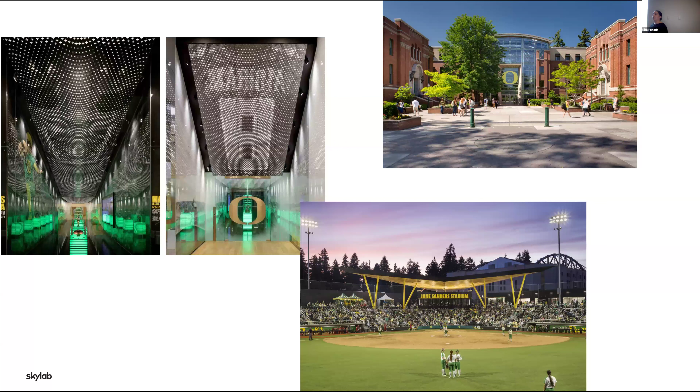I've also had the opportunity in my career, when I was with SRG, to work on several really fun projects on campus - kind of coming full circle back to my interior architecture education here. Early in my career I worked on Lillis, and then my last couple of projects at SRG were the Marcus Mariota Sports Performance Center and Jane Sanders Stadium, which were incredible design projects and a really fun opportunity to be back on campus exploring design here.

So that was a little bit about me.

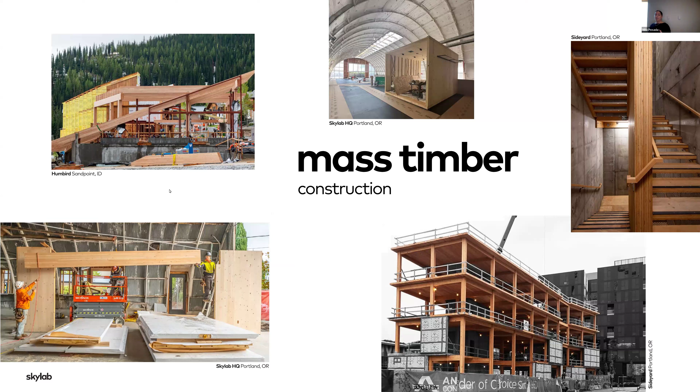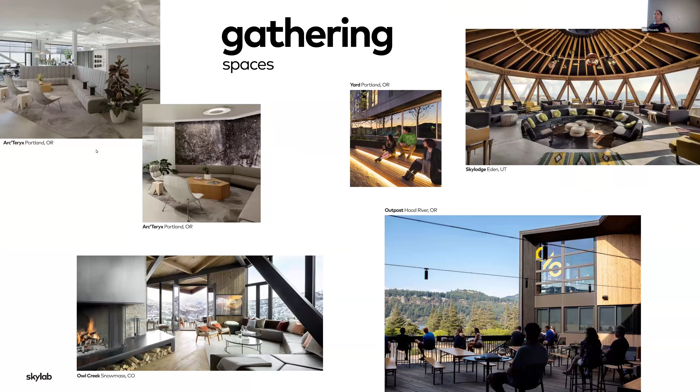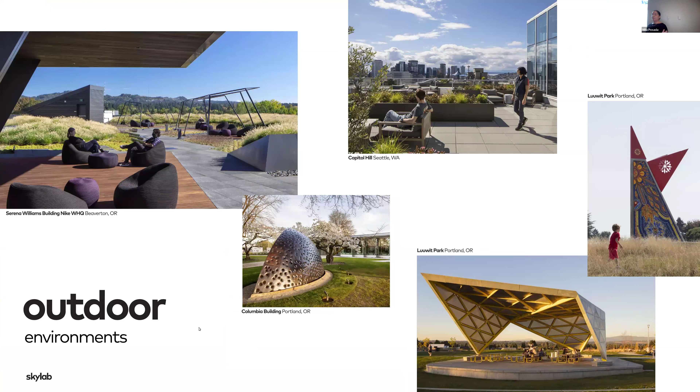A lot of different market sectors: workspace, gathering spaces, food and beverage, fitness and wellness, brand and art integration. Almost every one of our projects has all of these different typologies within it, especially in the big picture of brand, kind of big brand development and master planning.

Our practices and process and the way that we're able to be really exploratory in the work we're doing is by going beyond the planning, architecture, and interior side of our practice. We also have Skylab Construction and Skylab Development. Those were born of specific projects that didn't have a developer or a contractor, and we said, well, how hard can it be? We'll do it. So we created Skylab Construction, built a shop to build modules, and started to make that a really critical part of our 5 petals of practice.

Our process is really focused on art and science and the intersection between them—human experience, the stories we tell through art and science, the methods of inquiry we use to tell those stories, and the intersection of all of these things is what creates that magic. That centerpiece is the aesthetic beauty, the magic, the connection between place and form and the people that inhabit our projects.

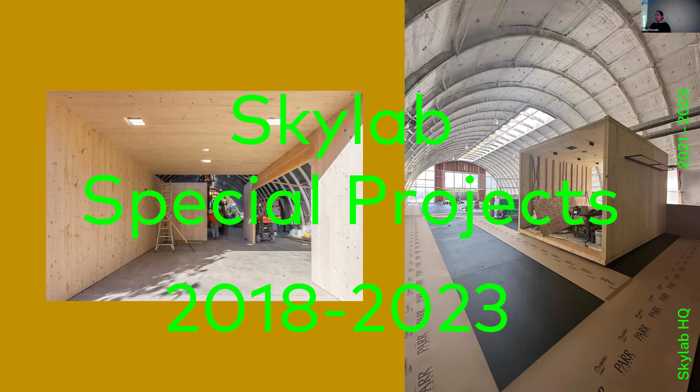So I want to share a few different projects as examples, and I'm going to go back in time. I'll start by telling you a little about what 2023 held for us. Even though this year is our 25th anniversary, last year was a huge monumental year in the history of Skylab. We undertook 2 major projects—one was our headquarters, which will hopefully be our forever home, and the other was creating our first monograph called The Nature of Buildings.

We have a full kitchen where we can cook together. We have outdoor space, places where we can do yoga, where we can garden. We have a 3,000 square foot shop where we can build things and test things. We have an art gallery who's our tenant, greenhouse space. We're talking about putting in a modular sauna and above-ground pool just so we can play a little bit.

So really the integration of the outdoor space and the shop brought together all of the things that were really important to us, as well as explorations like prototyping these modular CLT conference rooms that could be used in our space, could potentially be moved, could be rolled out for future clients—there's this size and then there's another larger one.

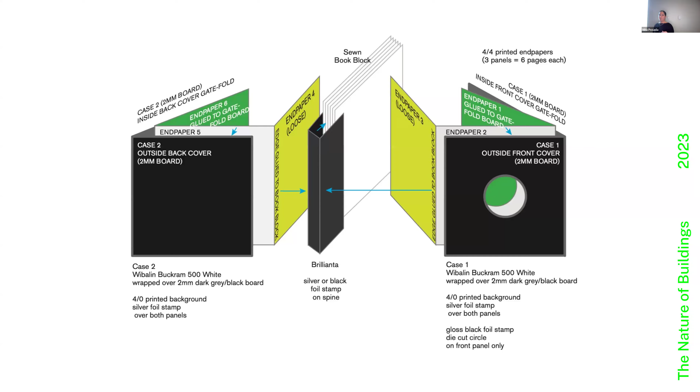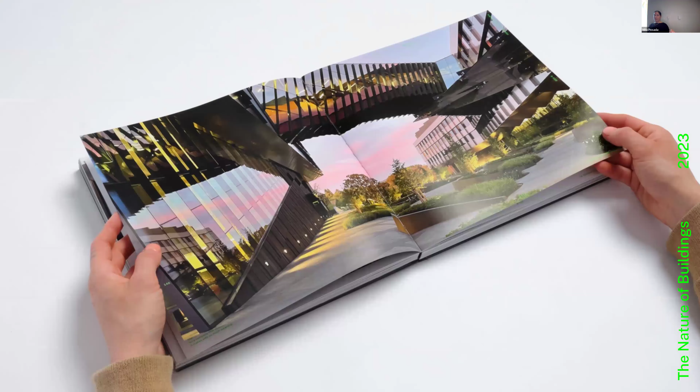This is just an example of an exploration and the visuals of the book. We really liked the idea that it was a tactile object that you would flip through, that you had to turn, that you had to open things, that within that book there was also not just your standard turning of the pages, but also the potential to have some posters, the equivalent of concert posters that open up and reveal these interludes of projects that weren't necessarily significant enough in our history to need 15 pages of the book.

We were also able to engage collaborators and others that we work with often: Mauricio Villarreal from Play Studio, John Hoke, who's a client of ours - you might know his home as the Twilight House, it is now for us the Lego House, so really exciting, they're turning the Twilight House into one of our architectural Lego sets. And then Randy Gragg, who some of you may know as an architecture critic and a big supporter of Skylab over the years. These essays were meant to be conversations that drew out some of the project stories beyond how we might tell them, but we also allowed others to tell our stories in the book as well, because that was really important for us.

Going back in time, the biggest project that Skylab has ever executed is the Serena Williams building at Nike headquarters. This building is 1 million square feet. We've never done anything even close to that.

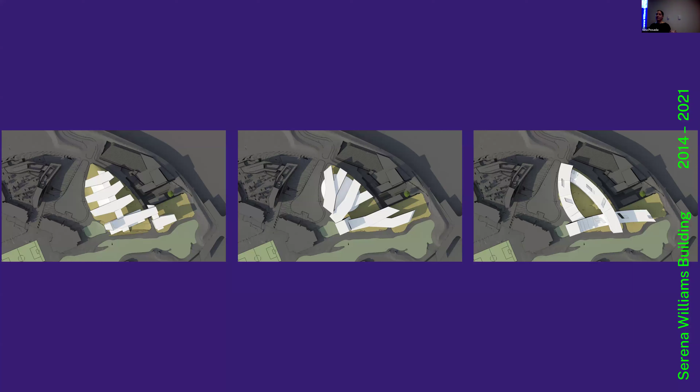So we looked at all of these things together, built the DNA of the project, and started thinking about how we might engage the site. One of the things that was really critical to us was to look at different inspirations for the diagram.

We ended up landing on the wing and liked the way that it represents a lot of different things - the way water moves on site, and it allowed us to do some things architecturally that I'll talk about. It's also just a natural element that speaks abstractly to the goddess Nike.

In this building we were tasked with a lot of different things - it's an office space, it's a lot of different food and beverage venues, and it's also their merchandising center. So for the first time in Nike history, a product can go from drawing to full retail mock-up in one building, as opposed to going back and forth all over the world.

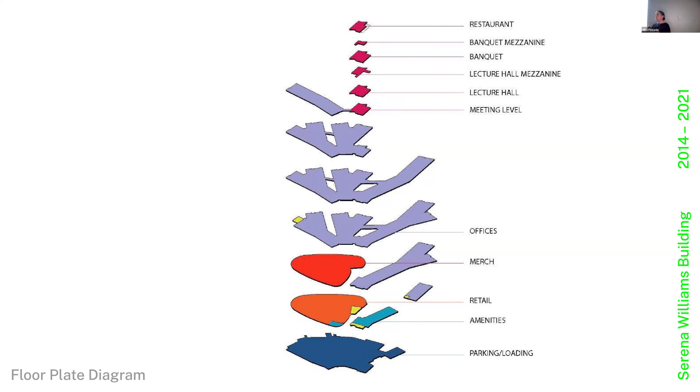The carbon footprint and the ability to innovate and connect was really important to us - how do you not only do that within one building, but do it in a way that feels really connected and integrated, so people can really see each other and learn from each other. So you don't have football designing over here and golf over here, with those things not speaking to one another.

The brand integration was really important for us here, and our consultant teams - Place Landscape, our structural engineers - did some pretty incredible feats. I think on this project in particular, structure and brand were two of the biggest areas where we were able to innovate and integrate.

Sustainability was really important. This site was previously all surface lots for Nike - now we have parking underneath. The last thing we wanted to do was take surface lots and put up buildings and call it a day. So we said, what if we create in this wing form green roofs and spaces in between the slots, so that you have green space everywhere?

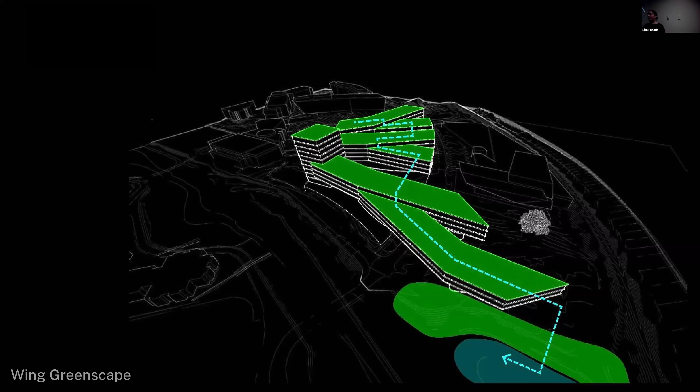And so that you have the ability for water runoff and stormwater to connect back to the wetland, which the campus had turned its back on for many years. Now we're celebrating and elevating that, creating a connection between what we call the Shoe Dog Bridge on the left-hand side - a connection between the Tiger Woods building on the old campus and the Serena building on the new campus.

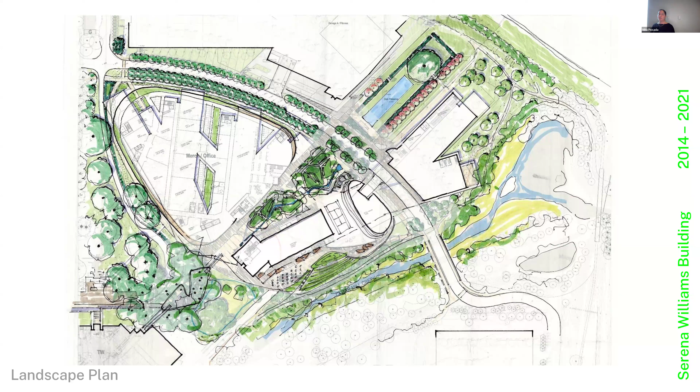This whole area in front of that wetland is now cafeteria space - open office space and places where people can actually work and engage with the outdoors in a way that was fairly new for the campus. These are just some initial sketches of that landscape plan and the integration with that wetland.

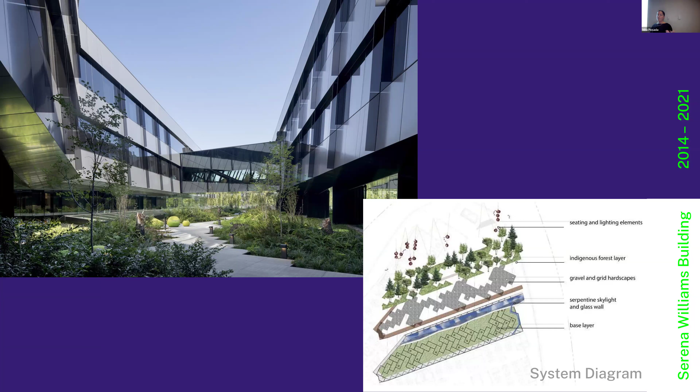This is just one example, but each slot between buildings also had separate ecological systems so that you could have very different experiences if you were outside on a roof deck or in a plaza between buildings.

We also liked the idea that you get some pretty stunning sunsets here, and these are some of the tallest buildings in Beaverton. So we wanted the building to reflect that, to at times have stature in the place, but also at times just reflect the environment around it.

This is an example of a roof deck that's 6 stories up, and it feels like you're in a parkscape because you don't see any of the buildings beyond. All you see is the hills beyond.

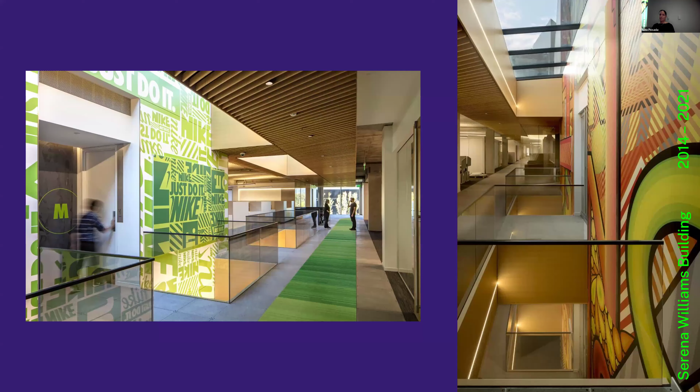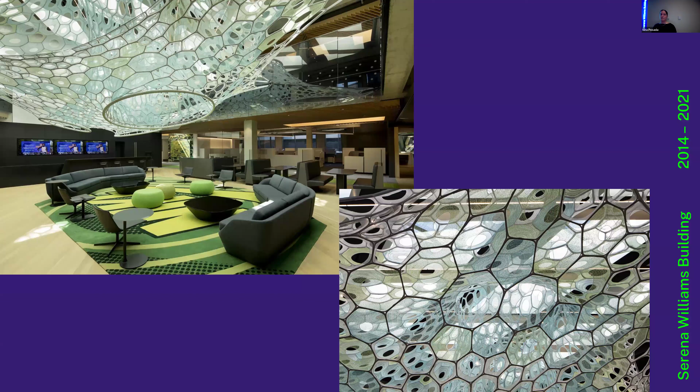These are some images just to share brand integration again, the connection of natural light and daylighting. All of the studios were connected by these stair cores so that the elevators are really pretty hidden. So people are moving throughout the space in a way that's really connected. And then the integration of art here was really important.

This was a piece by Jenny Sabin, and it was structurally engineered 5 years before it was installed. So the integration of interior design, architecture, structure, and art was such a critical piece of making this project work. It was the Skylab team, consultants, contractor, and the Nike team really helping to bring all of this together.

All of the food and beverage venues were named after Serena, after one of the open tournaments. So we have Australian Open, French Open, US Open. There were some really great opportunities to nod back to her history and her wins and everything she had engaged in.

And also making sure that we were connecting not only to internal heritage, internal work, everything that was happening within the building, but always back to the landscape, to Ronaldo Field, to the history of Nike and the heritage of the old campus as well.

We learned that one of our partners, Brent, is a tennis pro. So we had Brent on one side and like 15 of us on the other side, and he still beat us. It was 100 degrees. So someday there will be a rematch. If there's any tennis pros here, please come get a job at Skylab.

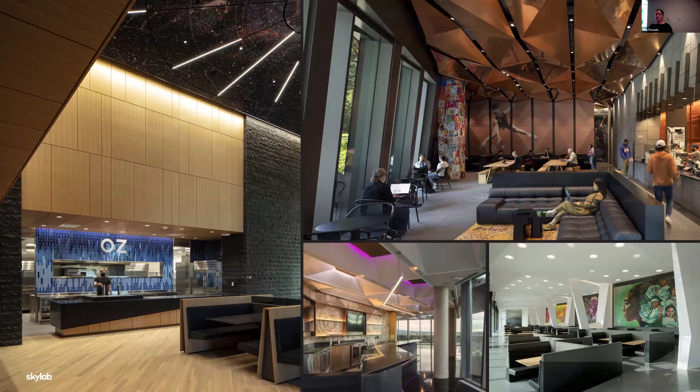Some of these are interesting just to share our process. We do a lot in 3 dimensions. These renderings almost became our CA set.

I'd say that's sort of in jest, but we spent a lot of time during construction administration with the detail contractor teams saying, what is this supposed to look like? We've never done this before. And we heard that almost every single OAC, every single contractor meeting, every week for 5 years. We've never done this before. How do we do this?

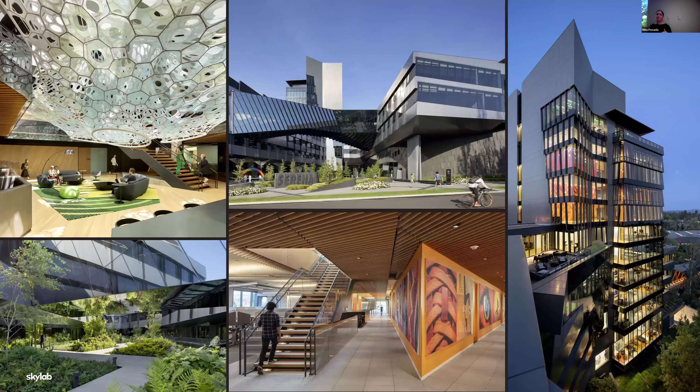So the 5 years of construction of this project, or what felt like 5 years, were just spent problem solving to go from rendering to the reality of what these spaces are as they're built out. So prototyping, lots of iterations, lots of design explorations into what ultimately became a really cool project and kind of a landmark project on Nike's campus.

So back in time, again, the Yard building was another first for Skylab. It was the first high-rise that we did. It was also one of our first projects where we were also co-developers on the project. So we had equity in the building, and we were able to be integrated into the ownership team in that way as well.

This project is really interesting because it's on the industrial part of Portland. There's not much there besides warehouses and industry. The Burnside Skate Park is directly adjacent to the building. And initially they wanted to build this little square of a building on that site.

We wanted to take inspiration from both the grittiness of that existing location, but also go back in time. It's not just about the place as it is now, it's about the place as it was before humans ever touched it. So what was the untouched riverbank? What was the Willamette River before humans were there? What did this natural environment feel like?

So we started to explore some form making. We started to explore relationships between Burnside Street, the Burnside Bridge, and the river. What could the tower do? What was maximizing views, maximizing solar exposure, and connections between the different levels that needed to connect to the building?

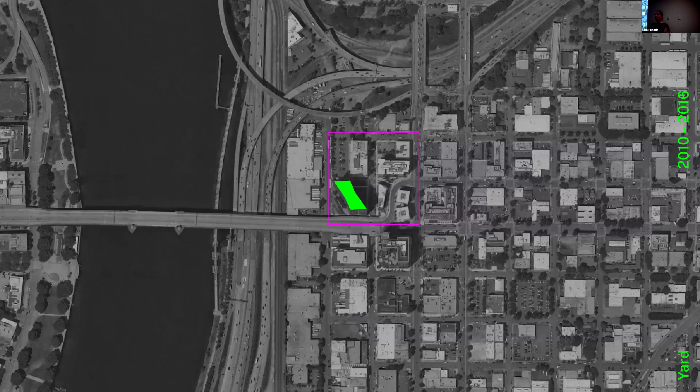There's also this huge stormwater pipe that cut through the site and created a really interesting diagram for the building, saying, in order to work around it, we kind of have to put structure here, therefore making this interesting shape. And when people ask why the bow tie, where did that even come from, it all has to do with the utilities that run under the building and not disturbing those, because it would have been cost prohibitive to do that. So the building, although you don't see it, was really informed by the context of the place.

So we're really proud of what this building has done in this area. The gardens thrive year round. They kind of change over time. They have pollinators there. When you move through the building, you get to experience the gardens. You see them from the Burnside Bridge, and it's been a really great catalyst for change in that neighborhood and a catalyst for building other things and other residential properties in the area.

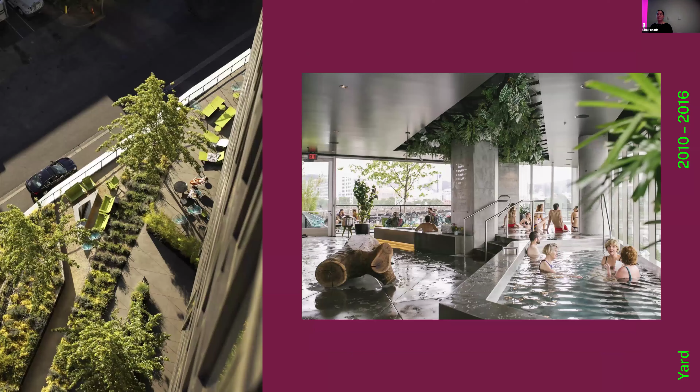Also within this building is a spa concept that we created called Knot Springs. This is sort of a modern social club, but it has the ideas of a Nordic bathing ritual. So you have medium temperature pools, hot tubs, cold plunges. You have a deck that you can see here on the left-hand side that overlooks the river and has incredible sunsets. There's also a gym, a member lounge, a co-working space. But the idea is that you could have regeneration, not only in the building, but human regeneration within the space, and really bring that into the city center.

So this is one of our favorite project images. If you looked at this, it feels like a parkscape. It feels really green, but you're literally in the heart of Portland, in the intersection of the city.

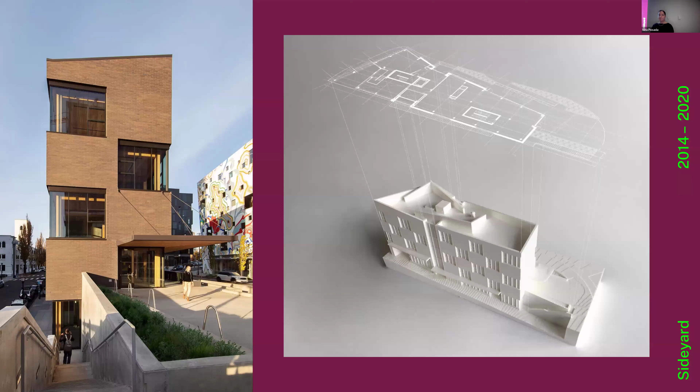In relationship to the Yard, there's also another building on a site that originally was not going to be anything in particular because it's such a complicated site. This is a couplet that funnels a lot of traffic over to the Burnside Bridge. It's a challenging site because you don't have parking or access from really interesting street levels. So we said, what if we do a sister building to the Yard? We called it the Side Yard, and we started to integrate some interesting and different strategies.

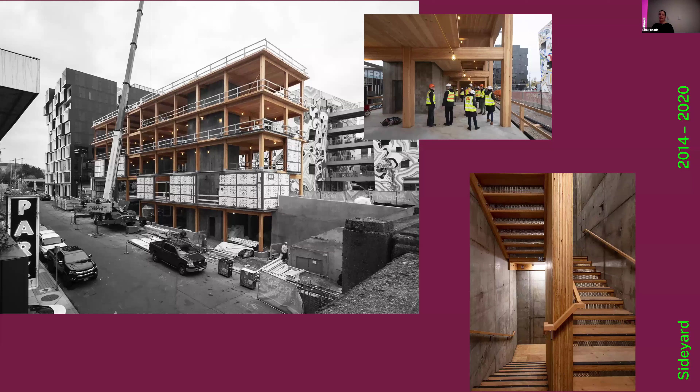On this one, the idea was that time was of the essence, we had to move quickly. So we did a CLT structure on this building and had a really quick construction process. We were able to put this building up and have these two really interesting projects next door to each other, also across the street from another interesting project, the Dumbbells. So these three have created what was going to be essentially just stormwater planters, turned into these really interesting built projects.

The last project I will touch on is, I think, one of my favorite projects at Skylab, even though it's a small project. This was some work that we did for Sandy Bodecker.

Sandy was one of the founders of Nike skateboarding and a designer at Nike for a long time. He was very involved in Arts for Youth, very passionate about art and music and bringing that to the community. Sandy was sick for a long time. He knew he was not going to be in this world much longer, and he wanted to really leave a legacy and build his passion project while he was still here. So he was a really incredible client, sort of the dream client that really let us do a lot of exploration and encouraged us to innovate, to be interesting, to do things differently, and to just play.

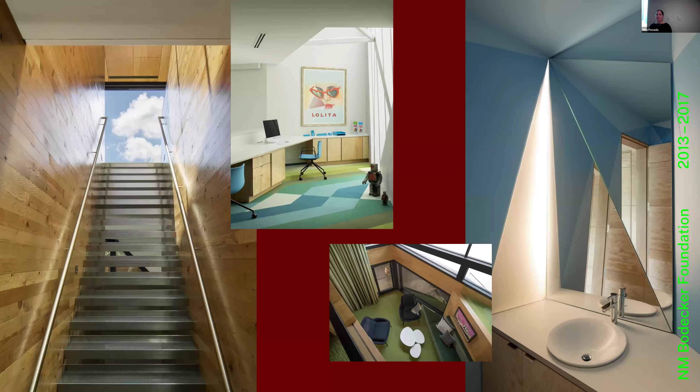Also, Sandy has and had an incredible art collection, so we wanted to make sure that was integrated as well. And he was a very colorful individual - his interests were very colorful, so we wanted to make sure that was also showcased in the place.

This is the project that created Skylab Construction. It was going to be cost prohibitive to do it, and so that's where we said, oh, it's fine, sure, we can do it. And so we designed this space, we built the space, and really learned a lot. So we're really thankful for the opportunity to work with people that are willing to give us that space.

One of the things we say often is that we reveal the unseen for those willing to seek it. So for us, it's about just having great collaborators, or sometimes we call them clients, but often it's collaborators and people that want to do great work with us.

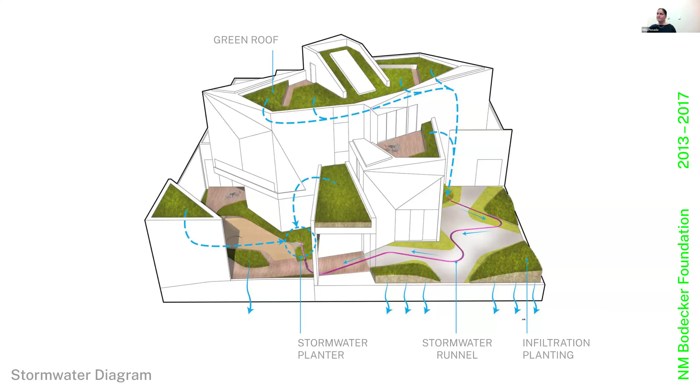Going off of that, how did you— I think it kind of also emerged over time. It was looking programmatically at what was working, and I know that some of them were just interesting design elements. We wanted to expose the history of the place and not just tear it down. And if we were going to reuse the building, we didn't want to hide it. Definitely the bow trusses, definitely that waffle slab on the front, and then some other parts and pieces just kind of happened organically.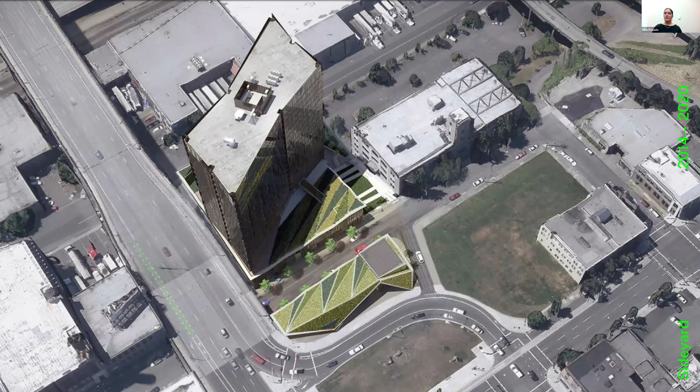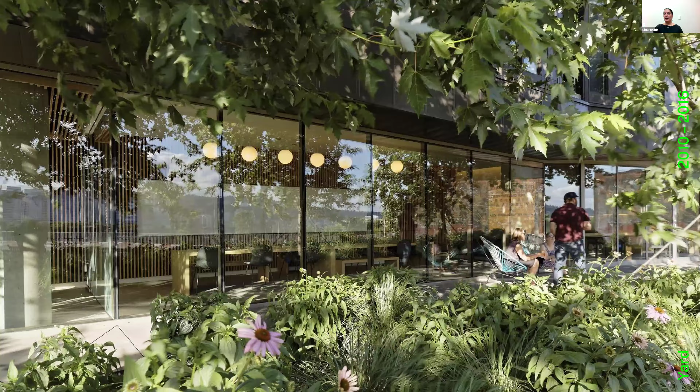That was pretty early on in the design phase, so we knew that was happening. I'm just looking for these diagrams. As we were starting to look at how to site the project, that was in mind. So we were able to take this information, take the geotech report, and combine that with these explorations on form and come to a solution. So we're pretty lucky here.

Yeah, all of our planted areas are intended to be kind of multi-functioning ecosystems. So we don't want to plant for the sake of planting and irrigating, because that sort of defeats the purpose.

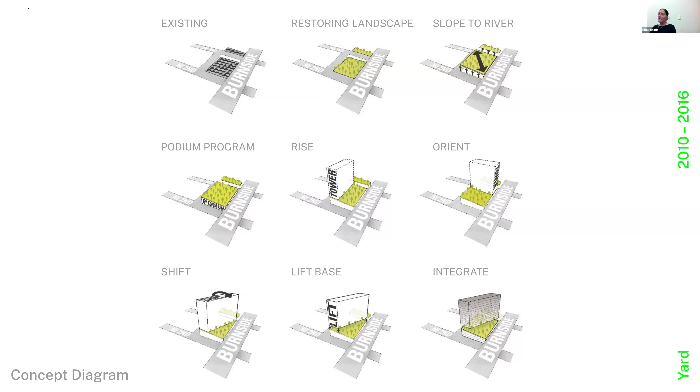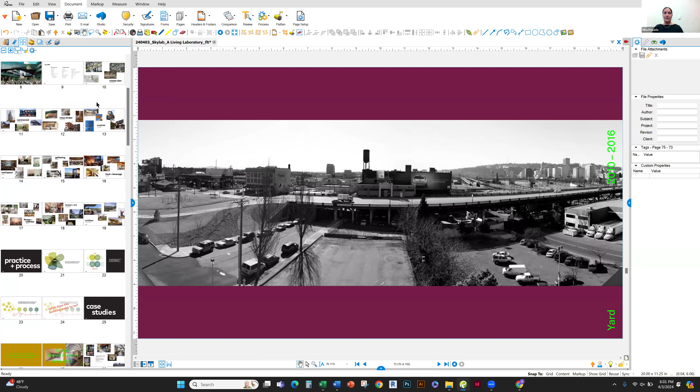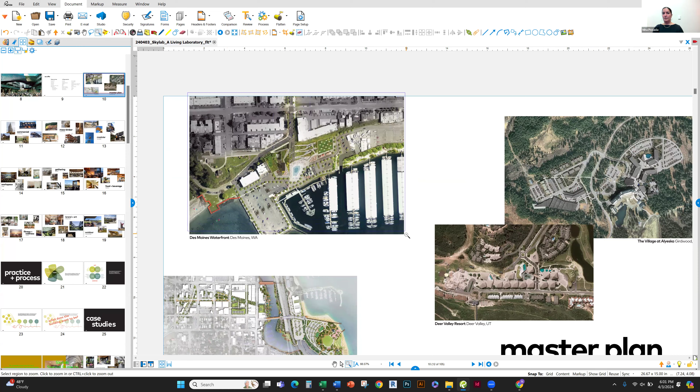So for most of our projects, even as we're doing our master planning work, we're really inspired by the water table and what's happening on the site. This is an example of a master planning project we did in Des Moines, Washington, where they wanted to do a waterfront redevelopment. The diagram for this project is all about what's happening with the stormwater and the water table, and how the water runs off from the main city back down to the sound, and that connection between the environment and the developed environment.

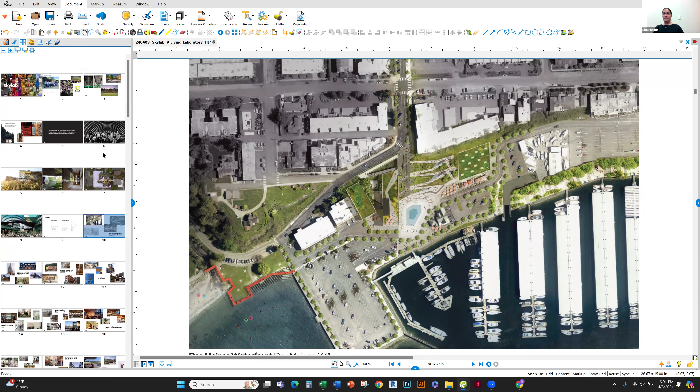We do it as a collaboration with our consultants. We have really great landscape architects and civil engineers that we work with often.

One of the reasons I really love practicing at Skylab is because there are very soft lines between architecture, interior design, landscape, and brand. I've never felt siloed as an interior designer. A lot of my projects are planning projects, hospitality resort master plans, or big scale indoor-outdoor spaces, so our consultants are very much part of our team.

Sort of a follow up on that — I'm really impressed with the landscape integration on the project, but if I'm checking, we don't have landscape architects in-house, right? Right, which seems interesting. Why is that?

So the landscape architects we choose to work with a lot — we'll work with new companies, but with the folks we work with often, and this goes for all of our consultants, we don't want to do a set of drawings and hand them off and say, here, now draw this, or here's your rectangle or triangle of land, figure out what to do with it.

We have design meetings — we don't just have coordination meetings, they're at the table — and often they're impacting and supporting the design of the building form and the connections to the outside, as we're also collaborating on the design of the landscape space.